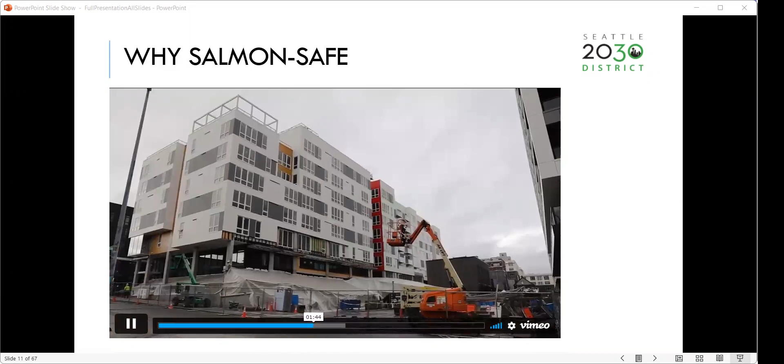Every one of our buildings is covered in green roof, so that's the first step for us as far as water processing. Then as you move down the building with our decks and the plaza and all those areas, we have a very complicated system of bioswales, taking all that water, cleaning it, and then sending it off.

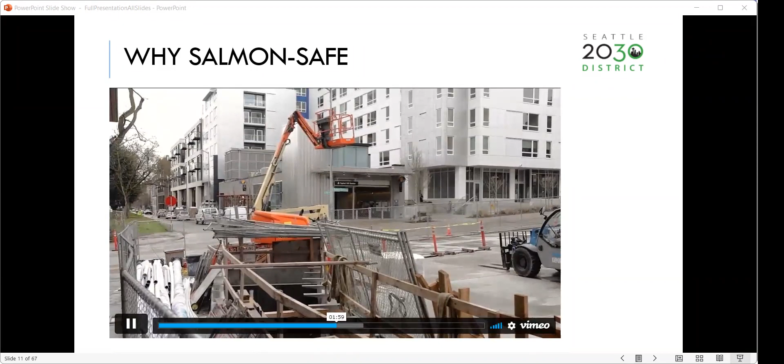We've made it important that all of our development managers and construction managers and the broader team are trained in what Salmon-Safe is. We have 17 properties certified at this point. Every property that we develop, it's been a great partnership with Salmon-Safe.

With our partners becoming certified, they work with other developers in the industry who are not necessarily certified, but those principles carry over. We believe it's really forcing the industry forward by hopefully being the leader in this. For Unico, it's important to partner with expert organizations like Salmon-Safe to help take the extensive and emerging research on this topic and translate it into actions we can implement.

I think when you prioritize smart, sustainable design, you're doing right for your tenants, for your future tenants, for your investors, for the community and the neighborhood.

And I think that's what matters. That's part of what sustainability is: creating something that has a lasting impact and is improving our planet.

I really think about the beauty and the iconic nature of the Puget Sound and our local watersheds. Integral to that beauty is very much the health of our salmon populations, the health of our orca populations, and the health of the marine life that we find in this region.

Salmon-Safe has given us great guidance and tools to make sure that we are protecting those local watersheds. The Salmon-Safe name is becoming more and more recognizable in the Northwest, and it's something that we like to promote. For us, it's doing the right thing.

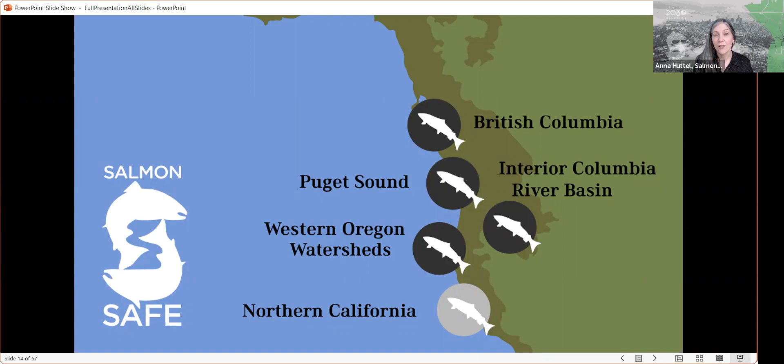We're now an independent, Portland-based nonprofit working through a network of place-based partners. And in Puget Sound, Stewardship Partners is our implementation partner. Salmon-Safe works across the range of Pacific salmon in North America, from Northern California through the Fraser Basin of British Columbia, and in recent years up in Alaska through an emerging partnership there.

Salmon-Safe offers certification across a range of land types and management activities, from urban development and corporate campuses to municipalities and airports, light industrial to, of course, farms and vineyards, where Salmon-Safe got its start working with vineyards in Oregon's Willamette Valley.

Salmon-Safe offers peer-reviewed standards across multiple sectors, from ultra-urban development in Seattle or Vancouver, BC, to agricultural sites. You can check out all of our standards at salmonsafe.org.

Thanks, Anne. For the purposes of today's presentation, I'll be focusing on our urban development certification standards as well as accreditation standards. In the couple of decades that we've been doing this work, we've seen huge strides forward in green building and sustainable agriculture and urban development, though not so much in ecological function and water quality protection. And that's Salmon-Safe's primary focus, whether the site is an international airport or a biodynamic vineyard.

These 10 principles are the foundation for all of our certification and accreditation standards, including our urban development program. Connect to Watershed Context recognizes that every project is part of something bigger and looks for watershed-based considerations in development and planning decisions. Integrate Habitats looks to restore degraded habitat based on pre-development native species and ecosystems, as well as the future need for climate change adaptation.

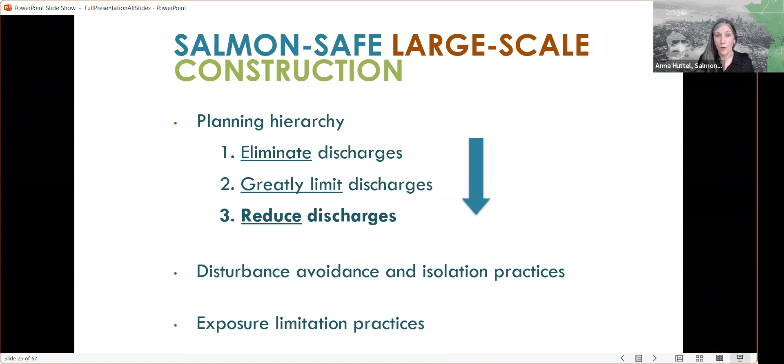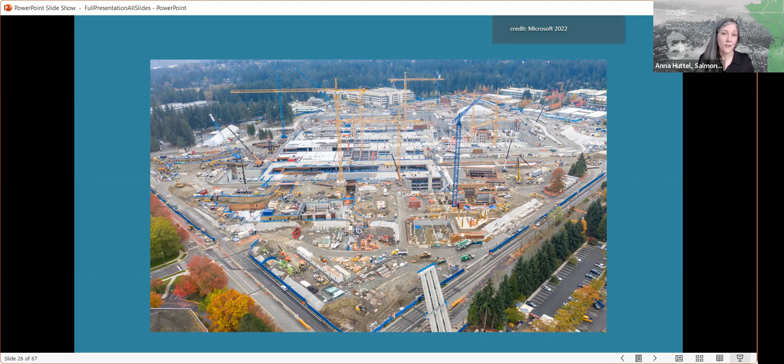An example of this focus on water quality protection during construction is a project midstream in development, the Microsoft Campus Modernization, just east of Seattle, which is Salmon-Safe certified and has a number of Salmon-Safe accredited contractors working on it, including GLY, Sellen, and Skanska. This 72-acre construction site is one of the biggest projects Salmon-Safe has had seeking certification ever, and joins a number of other tech campus projects around Seattle. In just a bit, you'll be hearing more from Bailey with Skanska about the practices they deploy across all of their sites to ensure zero sediment runoff.

For design professionals, we think there's a place to create beautiful projects with design for form and function, as well as watershed impact. Salmon-Safe accreditation for design professionals is a collaborative effort to engage architects, landscape architects, civil engineers, municipal decision makers, land use specialists, and sustainability consultants at a practice level, consistently applying environmentally innovative policies and procedures across their projects and at all stages of development, given individual project constraints. Salmon-Safe accreditation for design denotes an organization committed to conserving and enhancing the watershed in which its work is embedded.

For design firms as well as developers, we start by learning everything there is to know about an organization and how they tick when it comes to sustainability, the design process, and benchmarking of projects through design and post-construction. This is accomplished through a review of any policies and protocols that exist, as well as an in-depth learning session with key staff. From there, we conduct a drawing review with a representative sampling of project typologies and sizes, gauging them against Salmon-Safe standards. This learning and drawing review process culminates in the delivery of an accreditation memo that summarizes where Salmon-Safe sees kudos or alignment with its principles, and any conditions for continuous improvement for the organization to work on during its 3-year accreditation cycle.

Towards the end of our program, you'll hear from Dan, who will be highlighting the accredited firms that have made this substantial commitment to watershed health. And with that, I'd be happy to hand it over to Kiki Graham with Vulcan. Thank you so much.

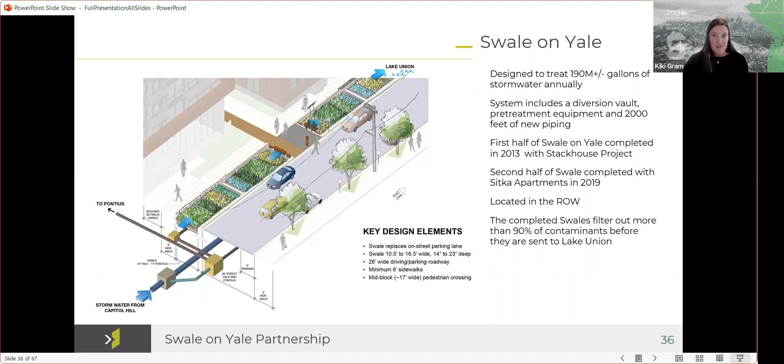In later phases, the swales were installed in the right-of-ways adjacent to and with the construction of two of Vulcan's projects. The Stackhouse Apartments was completed back in 2013 and the Sitka project in 2019.

The two swales are each about 270 feet long and range from 10.5 to 16.5 feet wide, depending on what right-of-way we had available to use.

These plants now remove 90% of the contaminants before discharging the water into Lake Union. And the city, with assistance by Herrera and other consultants, are able to study how well these are working and make tweaks and adjustments as needed to the composition of the swales.

This project is Sitka Apartments that I wanted to share, and this is one of the projects that we completed along with the construction of the final phase of the swale on Yale. It's a residential apartment project with 384 residential units.

And in this early rendering, you can see the swale runs the length of the project along the right-of-way. So it's interesting, you'll see there's no street trees or parking on this side. That was part of the partnership here with the city, was to convert what otherwise would have been planted with trees with this swale.

This project, to achieve Salmon-Safe certification, implemented the following stormwater management features. The project has a large cistern which collects rainwater for on-site irrigation, allowing us to use collected gray water to water our plants. The green roofs distributed throughout the project retain and create habitat, reducing the hardscape and roof water collection needs. The remaining roof drainage is directed to one of 5 bioretention planters, providing stormwater treatment during the capture and infiltration of water runoff.

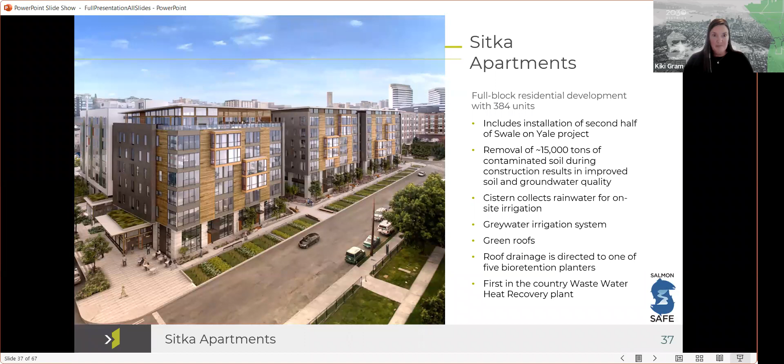Another project I wanted to share with you is our Arbor Blocks project. This was 2 new buildings for Facebook, totaling 195,000 square feet, and includes the planted and pedestrian-friendly Woonerf along 8th Avenue, which replaced the regular streetscape.

To reduce watershed impacts, this project features green roofs, totaling 23,000 square feet across the 2 buildings. This, along with the non-infiltrating bioretention planters, manages stormwater from approximately 75% of the new or replaced impervious surfaces. The diverse vegetation planted also allows for better habitat for our birds and bugs.

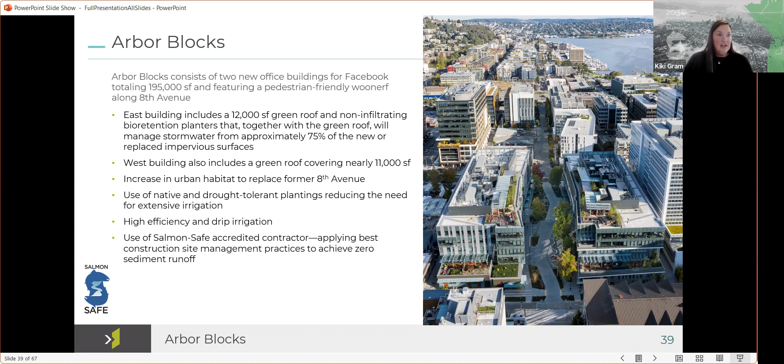This was another public-private partnership with the city, particularly with SDOT. We were able to replace the former 8th Avenue with this kind of meandering street called a Woonerf, which reduces the desire to drive through here but also encourages pedestrian use, biking, seating, and walking throughout it.

It also provides the opportunity for a lot more green space and habitat restoration, along with allowing us to preserve the existing trees. So we designed around that.

Additional measures to reduce water consumption include the use of native and drought-tolerant plantings, reducing the need for extensive irrigation, the use of low-flow fixtures throughout the building, and the use of high-efficiency irrigation equipment, using bubblers and drip irrigation so that we aren't wasting water as we water what plants require additional treatment to be sustained.

By working with our Salmon-Safe accredited contractor on this project, we're also able to apply the best construction site management practices, achieving zero sediment runoff. I have one more case study I wanted to share, and this one is a little bit outside the district.

It's in the central area in Seattle, but for us this is a notable project and one worth talking about. This site replaced, in the two projects totaling 532 units, 4 acres of paved and hardscape site. All of the stormwater runoff was untreated, so we felt this was a great case study and example worth sharing.

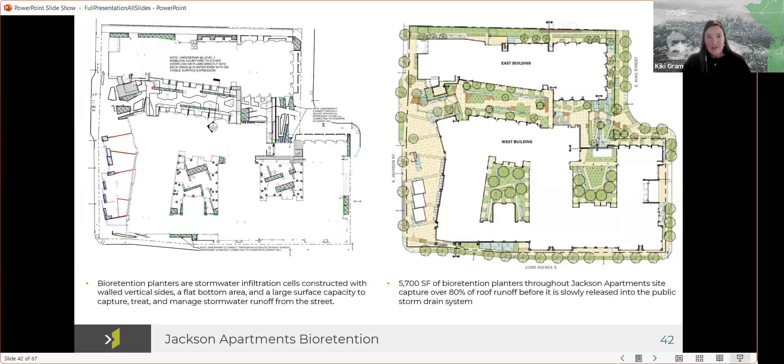I wanted to wrap up with something interesting. As Ellen talked about previously, Salmon-Safe is a complementary program to the LEED program we're all familiar with. There are differences between the two, but they work in concert together. Salmon-Safe is focused primarily on quality of stormwater, while LEED is focused on quantity. Salmon-Safe layers onto LEED by challenging developers to think comprehensively about the health of the watershed on a project-by-project basis, and on an ongoing life cycle basis of how the project will continue to operate after construction is completed.

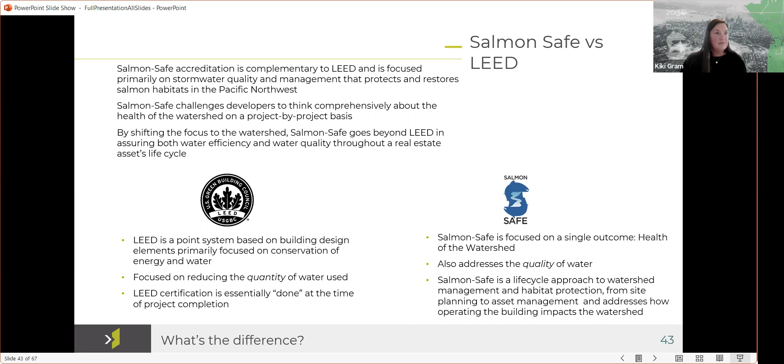All right, can you see me and hear me? I'll take that as a yes. Yeah, you're in, Bailey. Thank you.

Hello everybody, my name is Bailey. I am a sustainability engineer working for Skanska out of our Seattle office, and I'm going to be speaking about Skanska's construction practices from the building aspect of our company. My colleague Anthony will then talk from the commercial development side of Skanska.

So Skanska ties into Salmon-Safe. We were the first Northwest-wide accredited contractor, accredited in both our Seattle and Portland offices since 2019. We've been using our knowledge and best practices gained here in the Pacific Northwest to influence a lot of our construction practices throughout the country.

That means implementing pollutant control and runoff protection measures on our job sites with the goal of zero sediment runoff on all of our projects. I'll talk a bit about how we do that on the construction side, starting with construction phase stormwater management, including our site logistics practices when setting up project sites.

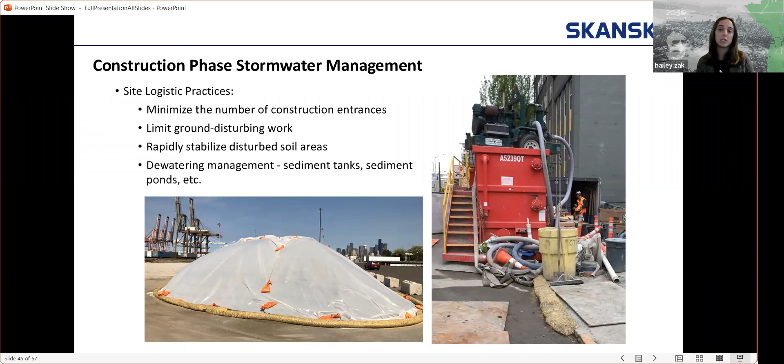Water gets pulled into these sediment tanks and flows through multiple tanks at different rates, providing a degree of purification where solids accumulate at the bottom as sludge, so those pollutants and dust aren't heading straight into the stormwater system.

The next topic is dust, sediment, and management control. There's obviously a lot of dust and sediment on construction sites when starting a new project or demoing. So first, we clean our haul roads during construction, spraying water to keep dust and other pollutants down and within our job site boundaries.

With aggregate and soil compaction, it's the same concept, and also with demoing—spraying materials as we demo buildings on site. We've also installed wheel washes on some job sites, again trying to contain sediment, dust, and other pollution within our site boundaries.

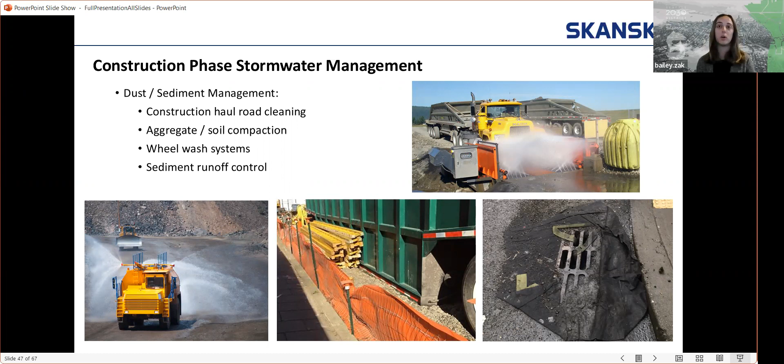We also use a lot of sediment runoff control practices. The two pictures in the middle and on the right show examples—there's a silt fence in the middle shot, and fabric filtration on all of our storm drains around the site. There are also examples of straw wattles used to divert and control runoff. The next picture shows one of our job sites, and as mentioned, a lot of this ties into our practices for our LEED certifications as well.

So this is an example of our temporary erosion and sediment control on our job sites. This is a report that we have to produce for LEED, but it also ties in with Salmon-Safe. You can see that little orange dot is a street sweeper, again trying to emphasize keeping dust, sediment, and other pollutants on our job site and keeping it off the roadway, ending up in the storm drains.

Our temporary construction entrance on this job specifically was steel plates and crushed aggregate, a combination of those two, trying to clean off tires a little bit as they're entering and exiting our job sites. The other arrow on the right is pointing to our sediment filtration tank for this job site as well.

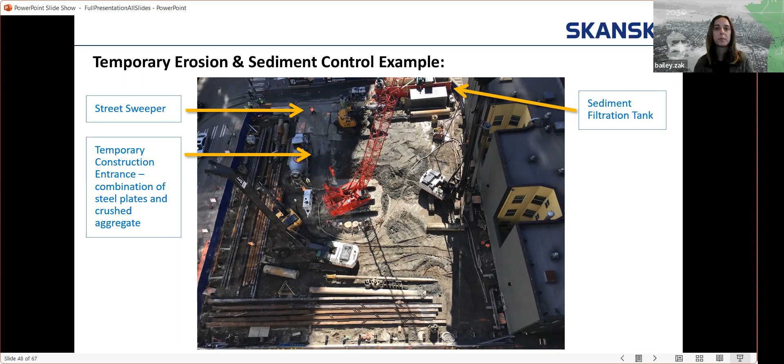The next slide talks about Salmon-Safe practices that we do for certifications, and being an accredited contractor also ties into Skanska's best safety practices. A lot of this is kind of like a 2-in-1.

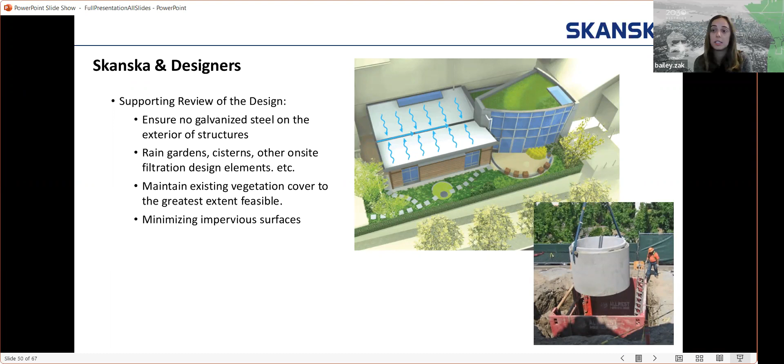I'm going to be passing it off to my colleague Anthony now to talk more about the commercial development side.

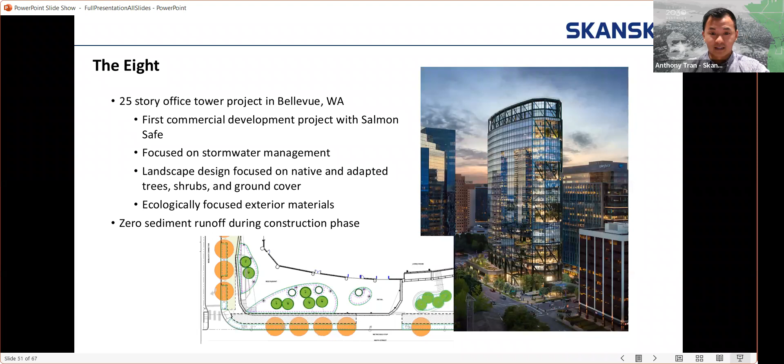Because our commercial development projects, we act as both developer and general contractor. In the construction phase, we're already committed to a zero sediment runoff policy, as Bailey has previously described.

Being our first commercial development project with Salmon-Safe, The Eight was a little late in bringing Salmon-Safe into the design process. Using those lessons learned from that certification, we were committed to bringing Salmon-Safe on earlier to a proposed project we have within the district called Kaye. Kaye is a potential 31-story apartment project located in Belltown.

With Kaye, Salmon-Safe really helped us focus our design on reducing the total impervious surfaces, and allowed us to take a critical look at our green stormwater infrastructure design. Specifically on this project, they helped us identify all the exterior materials that potentially were sending pollutants downstream, and really helped us focus on climate resilient species in the green roof and the bioretention planters throughout the entire project.

The review and certification with our designers was super smooth, and we were able to integrate those changes way early on, which was really great for us. Kaye is pursuing LEED Gold certification, and having the Salmon-Safe team on board through the certification process has been a really great complement for our LEED certification process as well.

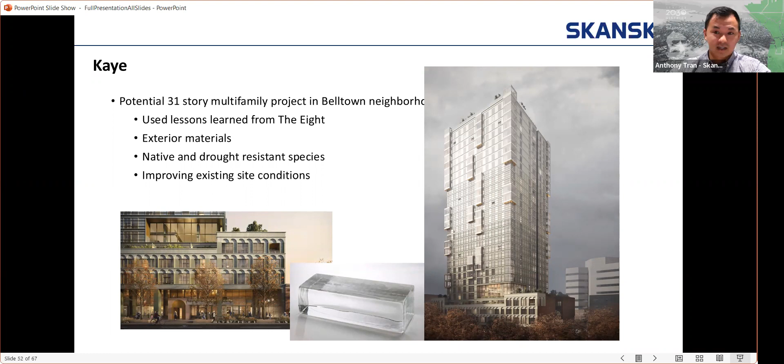At Skanska, one of our really big corporate goals is to be globally committed to building climate resilient urban spaces. Working with Salmon-Safe has been super beneficial and instrumental in reaching that goal. With each of our projects, we focus on the long-term needs of each community, and we think that specifically here in the Pacific Northwest, committing to pursuing LEED and Salmon-Safe certification is critical to building resilience against climate change, and meeting those needs within the district.

Our work with Salmon-Safe has actually inspired us to pursue a couple of additional initiatives to help manage stormwater in our projects. One of those is potentially using living green walls as job site fencing. We're currently researching a way we can use the lessons learned from the Salmon-Safe standards around exterior materials and biofiltration to help with stormwater treatment and offset our carbon on a job site.

Another initiative we've been inspired to use is collecting and storing stormwater on the site during construction for use in non-potable construction activities like dust control. We're pretty excited about these potential initiatives, and we really hope to work with Salmon-Safe on all of our projects in the Pacific Northwest moving forward. We would encourage other developers as well to seek out Salmon-Safe and their certification process.

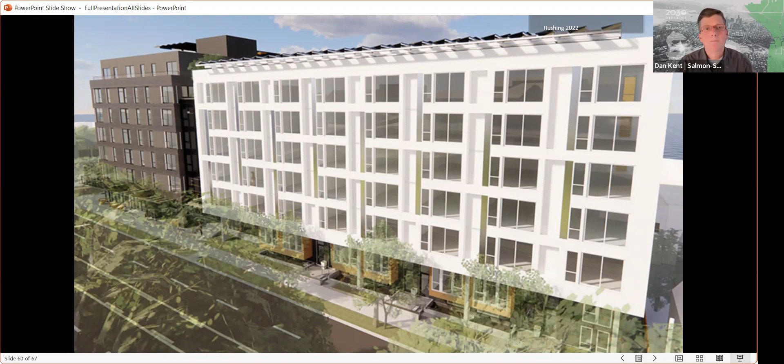Longtime Salmon-Safe project newly recertified is the Seattle Children's Hospital campus. It's a 30-acre site above Lake Washington in the Laurelhurst neighborhood. Salmon-Safe's involvement with Seattle Children's has focused on campus-scale stormwater improvements and design of new development, which is ongoing on that campus, including this latest project, the recently completed Forest B. Roughly half of the main campus is open space, and Salmon-Safe has also guided planning for enhancements in site ecological function at the campus scale with Seattle Children's.

Traveling east across Lake Washington, it's important to note that we're seeing a lot of new certification candidate projects in Bellevue and Redmond. One flagship project is B600. This is a 4-acre, 2-tower project in Bellevue that manages virtually 100% of stormwater on site. The project also includes an innovative gray water recycling system to provide water for indoor plumbing systems.

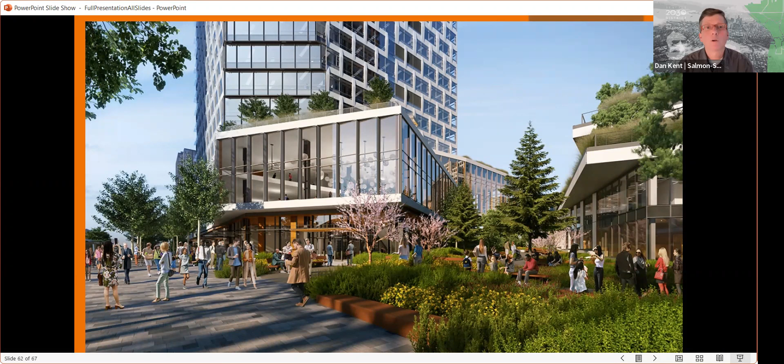With that, I wanted to shift gears and provide a couple of updates. First, on a note closely related to this urban development work, Salmon-Safe has engaged for more than a year now on the issue of tire dust runoff. Ellen mentioned this in her introductory remarks - 6-PPD, killing coho salmon and other aquatic life. If you haven't had a chance to view our joint science videos with Salmon-Safe BC, featuring WSU's Dr. Jen McIntyre, you can find those at salmonsafe.org. Thanks, Anne, for placing that link in the chat.

The first reporter that called the Salmon-Safe office a couple of years ago, when that very first University of Washington and WSU landmark 6-PPD science study was published, asked, 'So when are you going to be certifying Salmon-Safe tires?' And the answer, of course, is that there isn't a fish-friendly tire on the market. But in the meantime, we're working to strengthen the Salmon-Safe standards to really address mitigation measures for 6-PPD runoff, and also partnering with WSU in economic research, looking at consumer preferences, quantifying consumer preferences for a fish-friendly tire, so we can take that information to the tire industry and hopefully accelerate the transition to a fish-friendly tire.